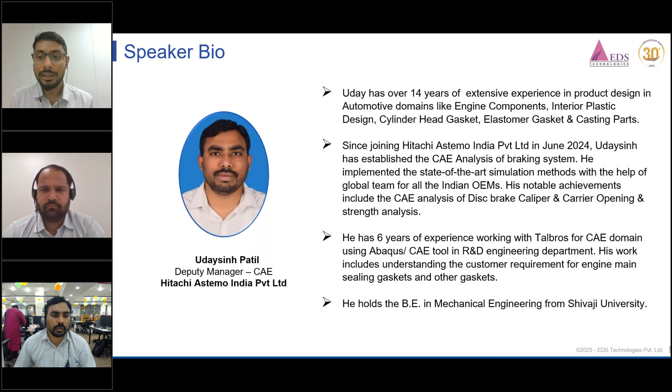Kedar Gokhale. Kedar is a senior application engineer with over 8 years of experience specializing in nonlinear structural dynamics, high velocity impact analysis, and crash simulations. He has successfully managed 3DEXPERIENCE SIMULIA, Abaqus, and isight projects and services across various industry verticals and handled multiple customer issues and escalations. So over to you, Mr. Uday sir. Good afternoon, all.

Myself Udaysinh Patil, and I am working at Hitachi Astemo India Pvt. Limited as Deputy Manager in CAE from June 2024. Yes, Kedar, next. So I briefly introduce our company. Hitachi Astemo was born in January 2021 from the merger of 5 companies: Hitachi Automotive Systems, Keihin, Showa, Nissin Kogyo, and Kalyani Chassis Brakes. So with the merger of these 5 companies, which brings strengths and abilities to make significant contributions to safety, comfort, and environmentally sustainable technologies for mobility. And that's the name integrated, Hitachi plus Astemo, Hitachi Astemo.

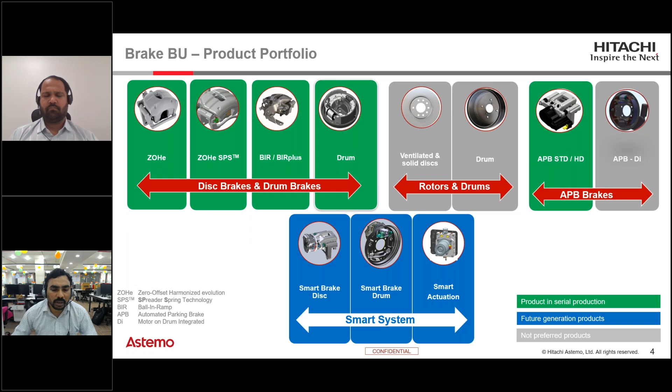So earlier in Hitachi, for meshing as well as model preparation for simulation, we were using CATIA V5. Our global technology and global process is using CATIA V5 tools with FMS, which is for surface mesh, and FMD for solid mesh, for CAE simulation model preparation.

And due to these separate tools, different types of mesh like surface as well as solid mesh we have to prepare to make an analysis model. And also we required another AFC tool to export that model which is meshed in FMS and FMD in the CATIA tool. We have to export with another license, AFC, to convert it into export files.

For example, for Abaqus we can use the input file .inp. For other tools it would be CDB and all. So it requires another tool for exporting that mesh. So all tools required basic CATIA licenses for the CAE engineer to perform model preparation for CAE: meshing, section, material assignment, connections, set creations and all.

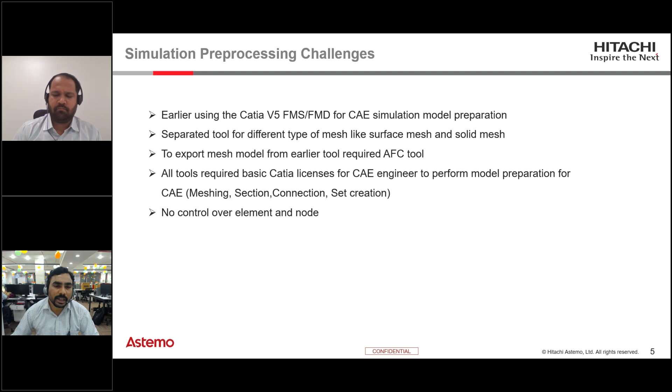So we have limited control and tools over the elements and nodes for selections, as well as to capture the critical areas of the geometry as per the casting parts and all. Yes. Okay. So this, yeah.

So we have moved from this combination of FMS and FMD to replace it with the 3DEXPERIENCE SIMULIA SB role, where we can mesh the CAD geometry easily. So this is one casting part, which is a caliper. We can import it from STEP as well as a CAD part or any other tool file. Here we can defeature the geometries as well, where chamfers or fillets are included, you can defeature from your part before meshing, which are unnecessary for meshing.

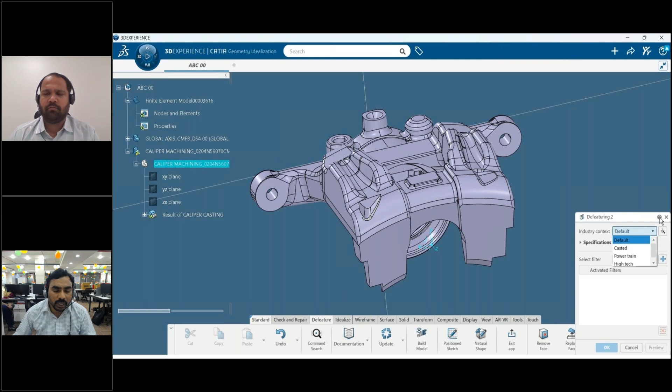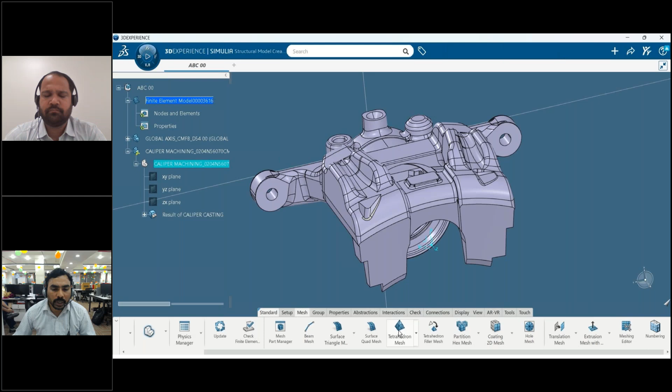So after that we have the meshing combinations with surface triangle mesh, where we have both first as well as second order options, and then we can mesh it with various sizes, and we have other parameters, edit all parameters, where we can edit as per our mesh and analysis requirements, where we have geometry as well as quality, maximum nodal deviation and number of nodes on the edge. These parameters we can set, and we can prepare the mesh on the parts.

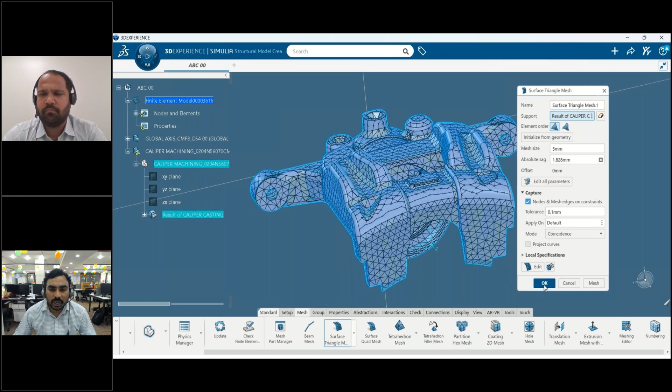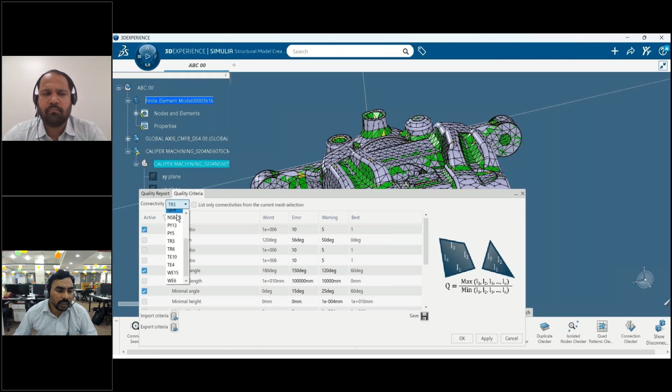So it's easy in 3DEXPERIENCE SIMULIA. We can firstly do the surface mesh, and after that we have to check the quality, and we have different quality criteria. As earlier in HyperMesh also, there are a lot of criteria: element minimum angle, maximum angle, Jacobian. For TET or 3D solid mesh, we have TET collapse or Jacobian. Warpage is also one criterion. So here also in SIMULIA there are different element types as well as different quality criteria, where you can clear the mesh with your quality criteria for analysis.

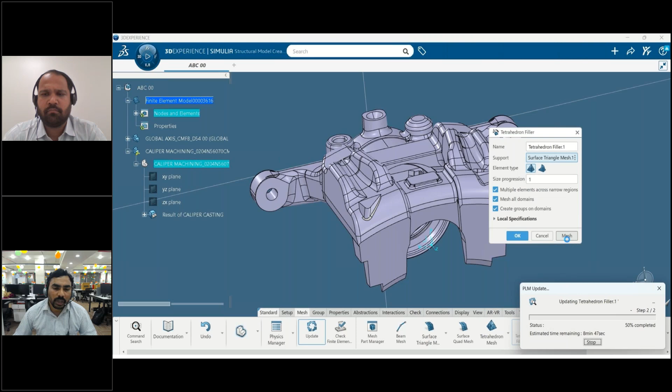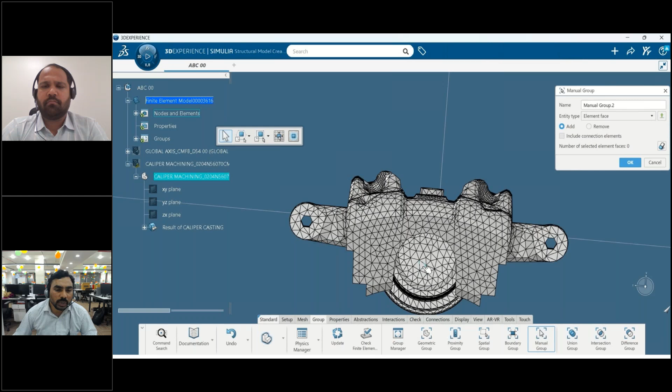After having this surface mesh, we can do a solid tetrahedron filler, which is a tetra mesh, and it is done within a quick time. After that 3D solid mesh, we can use group settings, node settings for boundary conditions as well as load inputs, and for output also, where you need displacement or stress in localized critical areas. You can define these with selection of node sets, manual groups, with various tool options to choose node, element, surface, element surface, as well as full 3D element faces.

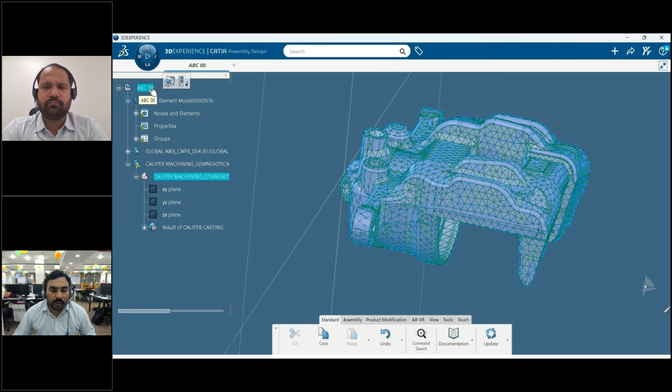Yeah, so these node sets and element sets we can use for analysis, and it is very easy in SIMULIA to make all the CAE deck preparation with these tools. Yeah.

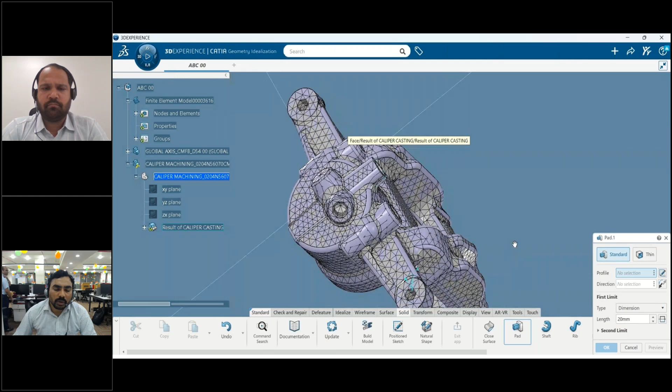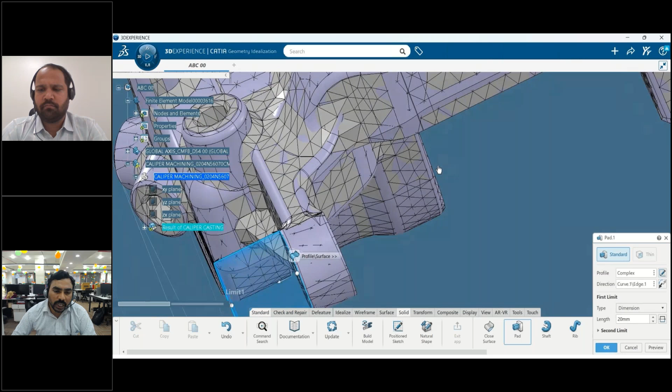And even in CAD geometry, it is linked with CAD tools, for example the CATIA tool; this geometry and the SIMULIA tool are linked. So if in future you want to change any feature, let's say at the bolt hole location, we can add geometry with 20 mm on both sides, and we just have to rerun this analysis. Only this change is there in the geometry.

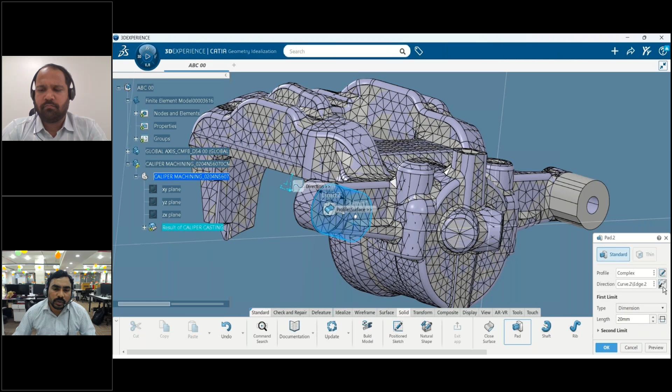So automatically in this SIMULIA software, this part's mesh will update as per the past model criteria, parameters and mesh size. So this is the benefit of the SIMULIA SB role, structural model creator role, where the mesh can be regenerated and updated, and it is linked with design tools like CATIA and others. So if you make any update in geometry in that software, it will automatically update here.

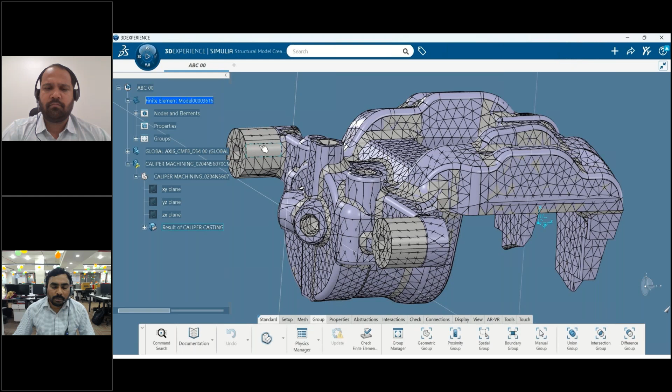Yes, see, these are the mesh updation with surface as well as 3D solid mesh. After that, you can use this mesh model by exporting option. You can use, if it is Abaqus, then you can use the input file for analysis, even other softwares also, like LS-Dyna for crash analysis and Nastran and all.

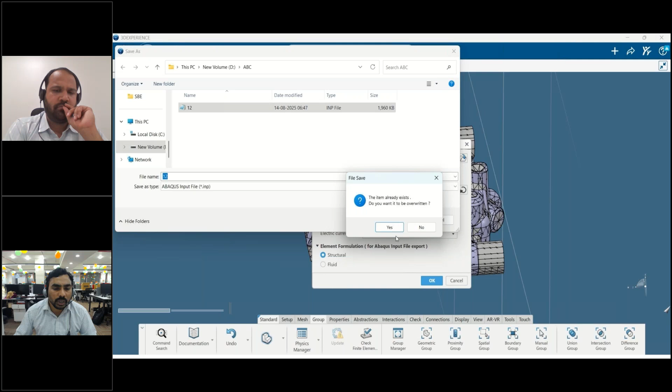So we have exporting output options also. Those are for various different analysis tools like Abaqus, Radioss, and Nastran. Basically, as per the global standards of Hitachi, we have to use these three tools like CATIA, FMS, FMD, and AFC, another tool for exporting that mesh model.

So we have replaced these with one meshing tool of the SIMULIA SBE role, which is having all types of meshing available in a single SBE role, and it gives control over specific elements and nodes. Export option is available with the same GUI.

More meshing features like ruled mesh, mapped meshing, and ruled connections are beneficial in the same role. Easy to manage mesh and connections through feature management. Seamless integration between CAD and CAE, and seamless integration with the existing 3D Experience platform, with parametric capabilities for mesh changes. So that's why Hitachi has decided to use this one for assembly as well as single component meshing, as well as analysis, for this SBE role SIMULIA.

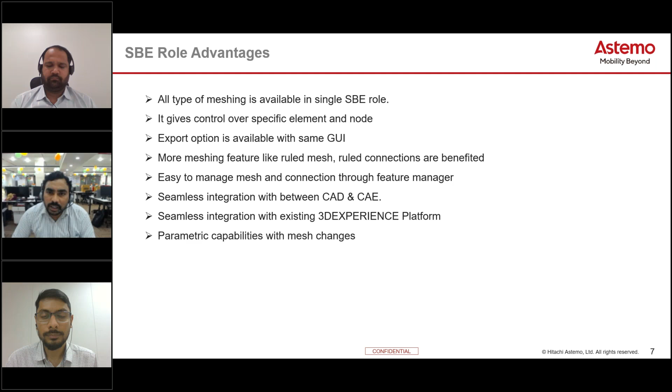Yes, sure. Thank you, Abhay, and thank you, Uday, for the brief knowledge sharing session on this, how it is useful to you or your organization, and how it is reducing time in model preparation. So I'm going into a little bit of technical detail on this particular SBE role.

So my agenda will be: first, automated mesh generation and rule-based techniques, how we are going to use that, and what are the benefits and options you get. Then optimizing the assembly and connections with the mesh and connection manager, how we can quickly change the meshing size, how we can change the connection type or bolt diameter, and how we get control to optimize connection and mesh management.

Then we'll see topics associated with the finite element solver, which type of files can be exported from this particular meshing role or SBE role for analysis, as we've already seen, but we'll put a light on that. Then particularly how this CAD and CAE integration works, how it is useful. We'll see that demonstration in this session.

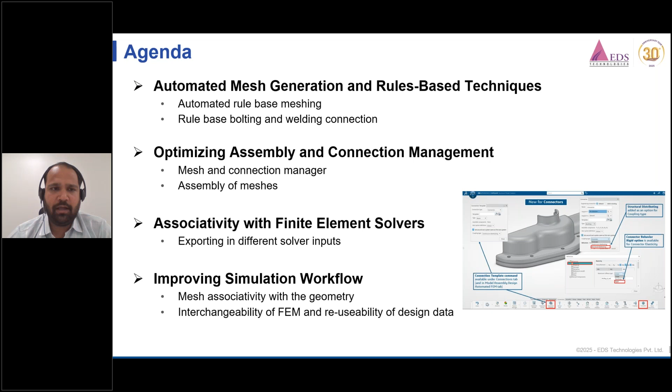So I'm going to show you how rule-based meshing techniques are used in this SBE role. While creating a rule, you get different types of mesh options. Here you can create a rule for octree triangle mesh, or tetrahedral mesh, surface triangle mesh, surface quad mesh, sweep mesh, beam mesh. So each and every mesh type is covered into the meshing rule.

Once you select the meshing type for the rule, you go into the details: which type of element order you want to create, what will be the mesh size, global mesh size, minimum mesh size, and maximum mesh size. In the quality criteria, you can set minimum triangle, maximum quad angle, minimum quad angle, warpage, and skewness.

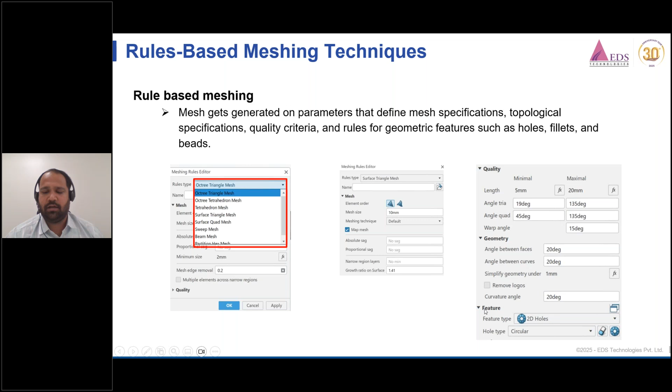Then, what type of geometry you want to capture while doing meshing, you can choose by setting angles for selecting the faces or curves. If you want to put a washer around a hole, you can select a particular feature type and set how many elements you require around the hole, using the feature option. We are going to see this demonstration in detail, how we use that.

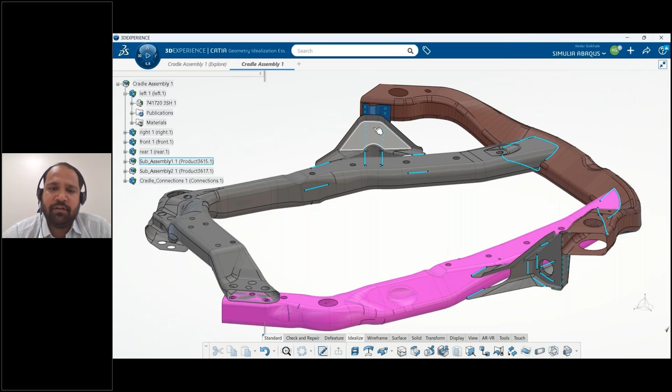For this, I use the cradle, an automotive cradle assembly, in which the surface components are there, along with welding locations, seam weld locations, and point weld locations, shown here with the blue lines. These are weld locations and weld points on which we need to create connections. There are also bolting locations where we need to create bolted connections, and we can create a rule for the connections as well as the meshing.

So here we'll see how to create a rule for the mesh and how it is useful for mesh creation. I'm going into automated FEM, where we first need to create a rule, and it can be used for any type of geometry in the future. Suppose you import a different part, you can use the same rule for meshing. Once you've created a rule for the mesh, you can use it at any time—it gets saved into the 3D Experience platform.

So here I am generating a particular surface quad mesh rule. I have selected the mesh type as a mix mesh, element order will be first order element, and mesh size will be around 10 mm.

Here you get different types of mesh: quad dominant, mix, and tria dominant. Here I am setting the mesh size to 10 mm, and the mesh technique I am setting as default. The growth ratio you can define as 1.41 or anything whatever you require.

Then for capturation of the geometry, here I am setting the capturation limit. I increase that to a 45-degree angle, so every surface will get considered and selected. So this is my quality criteria.

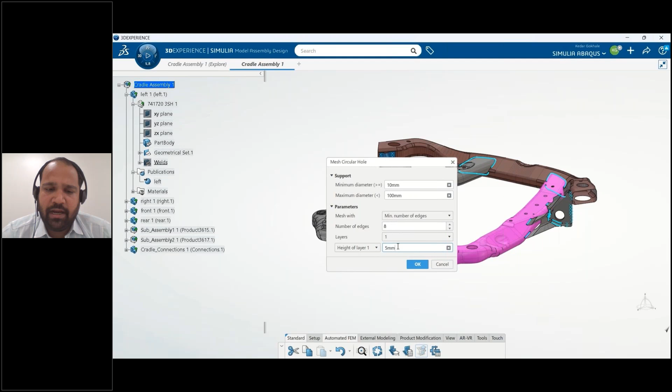One layer is sufficient for me, and the layer height will be 5 mm. So I've created this rule, and it will get saved into the platform. You can fetch it at any time while doing meshing and apply it to your part, automating your meshing with the rule mesh.

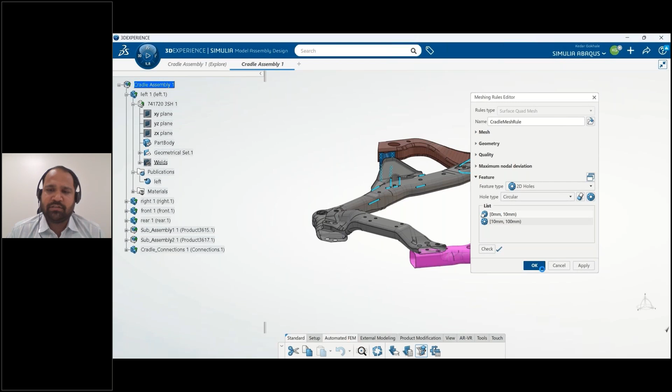So this particular mesh rule is created. Now I am going to assign this rule to all the parts available in the assembly, and we are going to create an automated mesh. For that I will go into the automated FEM.

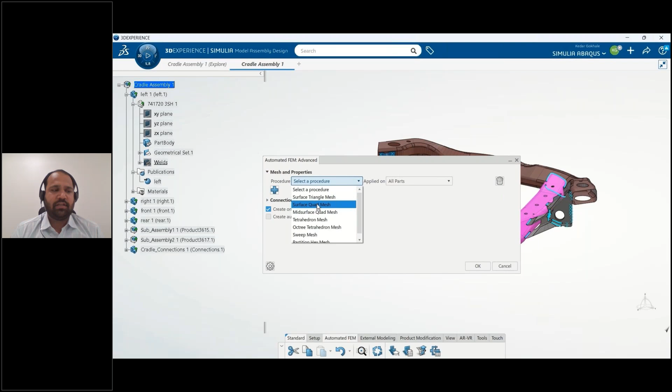In that I will create an advanced option for the automated meshing. Here I want to select the procedure, so I will be using a surface quad mesh. Then it will be applied on all available parts, and selection will be on the main body.

So the main body of the part will get the surface mesh applied, and support for that mesh or body will get it from the available publications linked into that geometry. Now we need to select that generated rule, so here I am selecting that generated rule for the surface mesh.

So I am fetching it from the library which is already saved - we have created and saved it. So this is available, now I'm selecting that particular rule. Once you have selected it, this criteria gets applied to the meshing style.

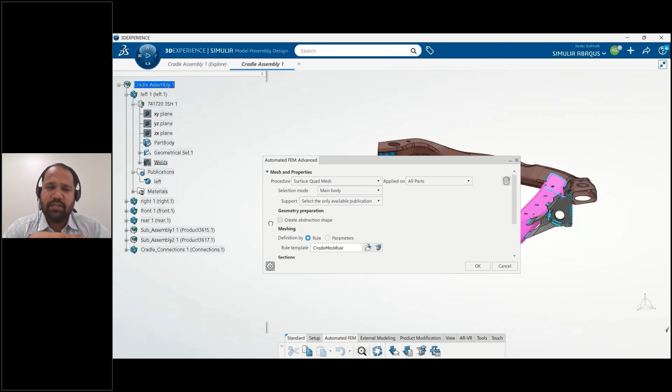So this is done. Now here we get some options for the settings to do exclusion or inclusion of the mesh and all - particularly quality criteria and all, if you want to fetch it you can do it, and automatic export option is also there.

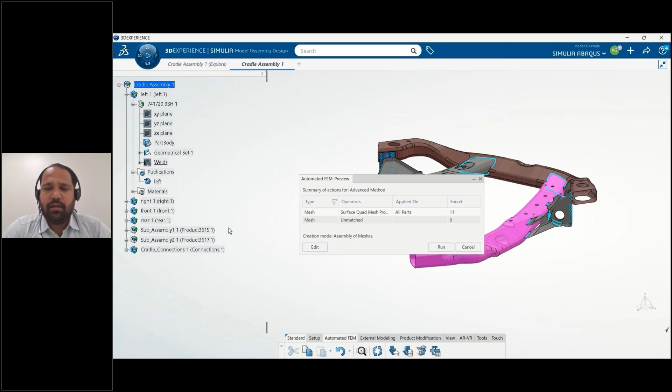Then once this setting is done, I am setting OK, and I will do this automation. Now you can see the mesh parts found, 11 parts are found, and there are some parts that are welding lines that need to be excluded, as they don't require a shell mesh or any mesh.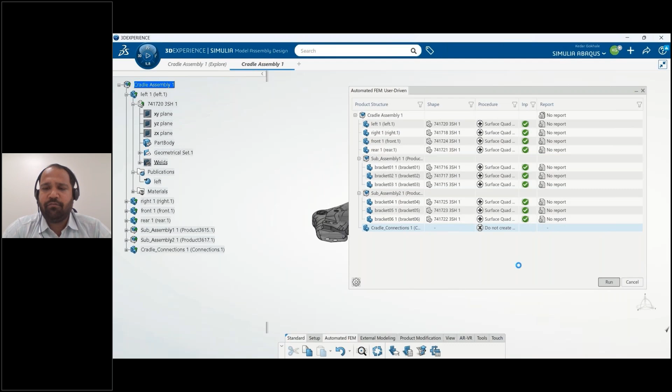So I'm going to exclude those particular weld line parts from the meshing automation, and I'm going to run it. After running it, it will execute step by step over each and every component - this process you can see in the progress bar.

So out of 10, 0 parts are meshed. So once it progresses, you will see one part meshed, second part meshed, and if it fails according to the rule we have set, it will get reflected into the failed FEM parts.

So once it is done, we can view the mesh, how it is captured, how the geometry is captured, whether the mesh around the hole is maintained or not, how the washer gets placed around the hole. So now you can see the progress in a progress bar.

So 3 out of 10, 4 out of 10 parts got meshed. So like this, it will get processed. If your assembly is made up of 100 or 150 parts, it goes step by step.

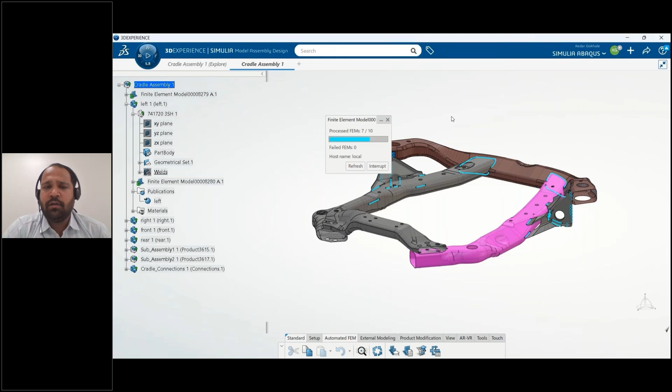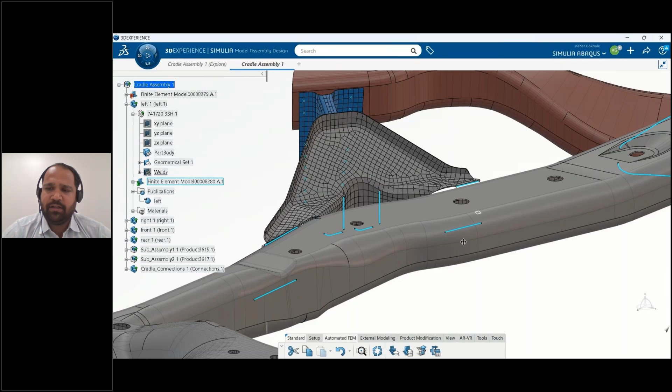Now you can see the report - zero errors found and all parts got meshed. Once you say yes, done, you can see the mesh in the background. So I'll say okay, and we'll view the mesh. After applying the shell mesh or the rule mesh with the surface quad element, you get this particular mesh.

If you want to edit this particular mesh, you can go individually to that particular component and edit it from the feature manager. We'll cover that in a later session, to see how to use it.

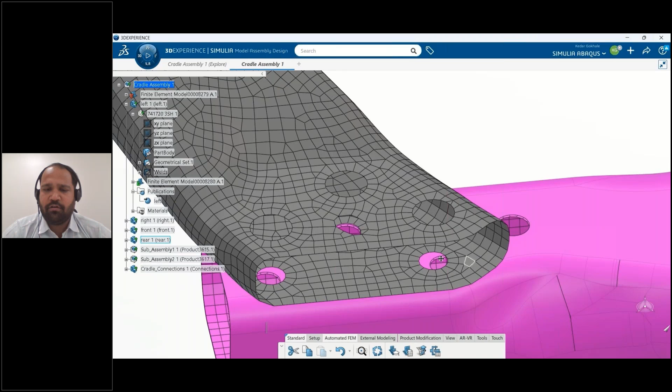Here mesh around the hole, we have set it as a minimum 8 number of elements, and that criteria has been achieved. So that particular criteria is achieved, and a washer around each and every hole is placed. This is the particular quality for the automated generated mesh.

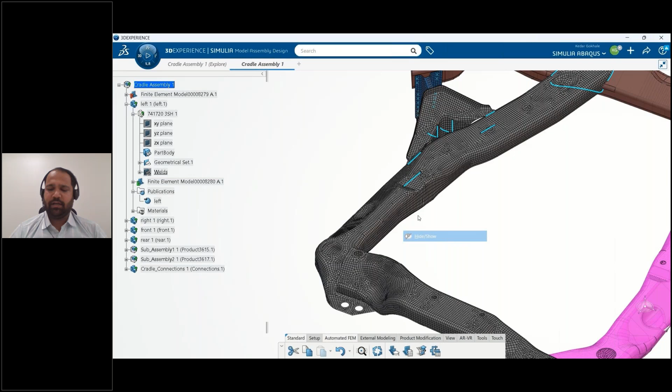Similarly, you can do the connections like creating a bolted connection, a line fastener, line welding, surface welding, or point welding. You can create these by a rule-based connection template. In the rule-based connection template, you need to specify what type of connection you want, what will be the head diameter, nut diameter for the bolting connection, what will be the construction of the mesh, and so on.

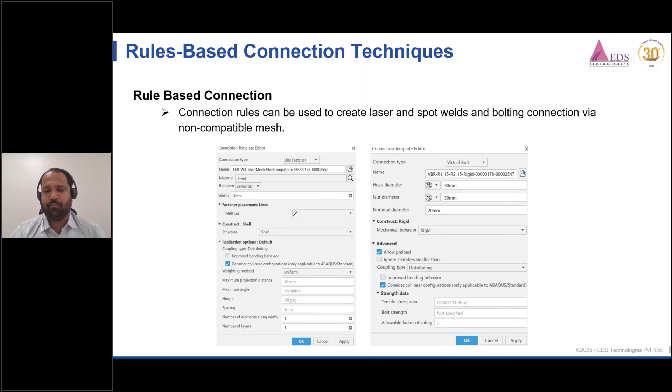Similarly, you get options for what kind of geometry you want to capture. You do that particular settings and run the rule for the geometry, and it will create connections by maintaining that rule. So it will look like this, which we have generated by using a rule-based connection.

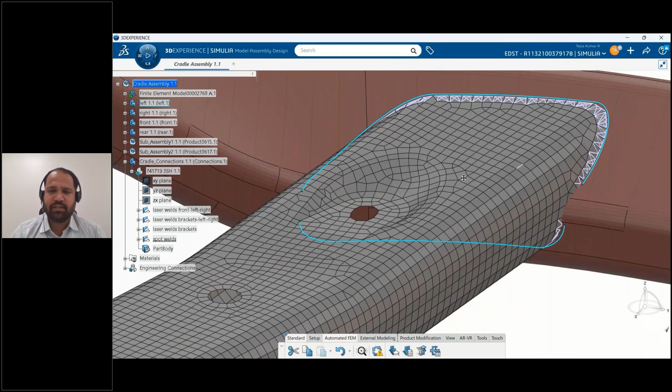Here the particular welds have been generated with the shell mesh. In a curvature area this particular weld element got created. You can see the bolting elements also, welding elements also. Here we can see the shell welding element in this particular section, like this.

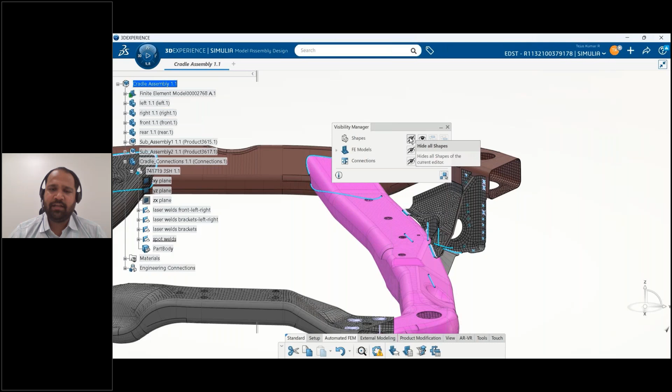So all over where the line is drawn for the welding, the weld got created. It will not miss any geometry. Wherever you specify the welding line, it will generate a mesh with the specified criteria. You can see at each and every location it got created.

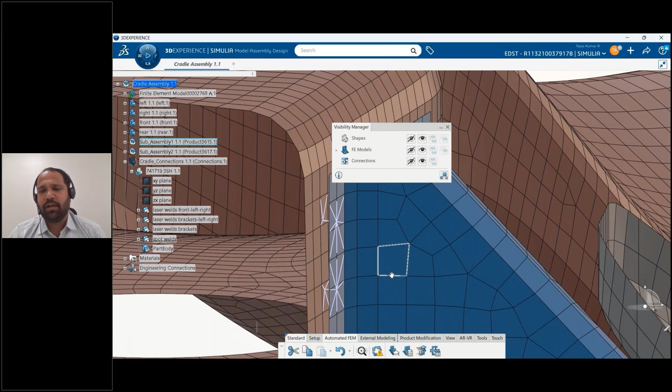Here a 1D beam element also got created for the welding connection. So in some sections we have created a beam welding element, and in some sections we have created a shell welding element, and it got created according to that.

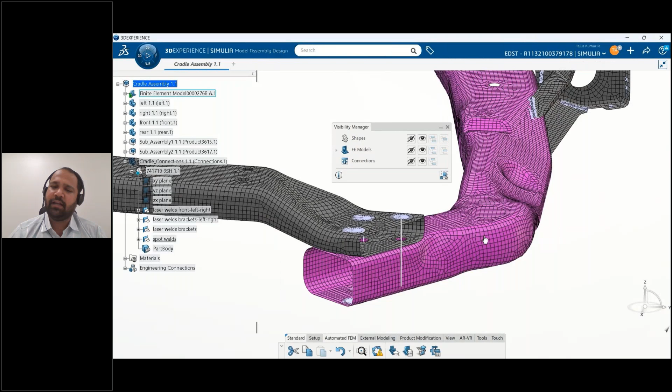Then these are the bolting connections we have created. According to the node and head diameter, it got created according to the hole size. So welding connection as well as the bolting connection are also created by using the rule-based connection method.

Once you're done with the meshing and the connection, later on if you want to go to a specific location and change it, you can easily do that by accessing the particular feature manager.

For the meshing, it will be a mesh part manager in which you can see which type of mesh is there and what will be the size. If you want to increase the mesh size, you directly go into this column, change the particular size, and regenerate the mesh for that individual component also.

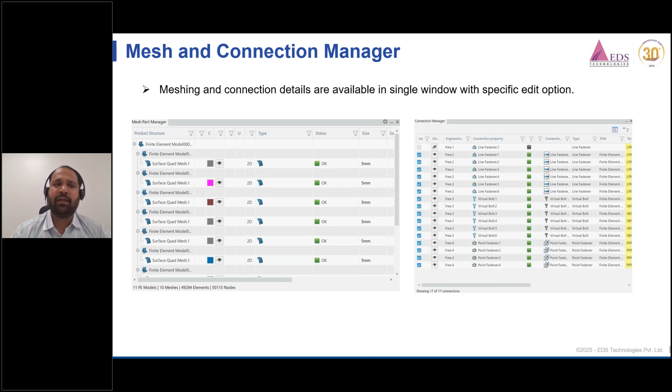Here also, in the line fastener, point fastener, or virtual bolt connection, you can create or edit the particular connection or welding definition by accessing through the connection manager. We'll see the particular demonstration in the video.

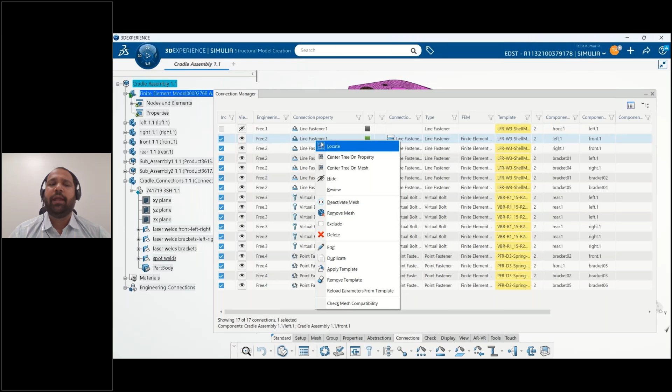So this is the particular connections and mesh geometry. We are into the connection manager. Here line fasteners are there, nothing but the shell welding geometry. So if I want to edit it, add to it, or make some changes, I can easily access that particular thing.

If I want to change the material, or change the component at that particular location, I can do that by accessing the feature manager. Here you will get all of the editing options which are available in individual definitions also. So here it will be 3 mm, and you can increase or decrease it.

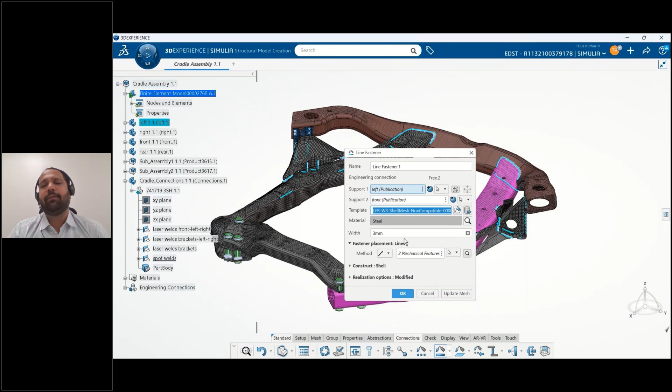Similarly, you can have access to the bolting connections also. Suppose if I edit this particular bolt connection, here you can see the edges I have selected automatically. Here you can change the definition, the bolt and all that, the diameter of the bolt, head diameter, and so on.

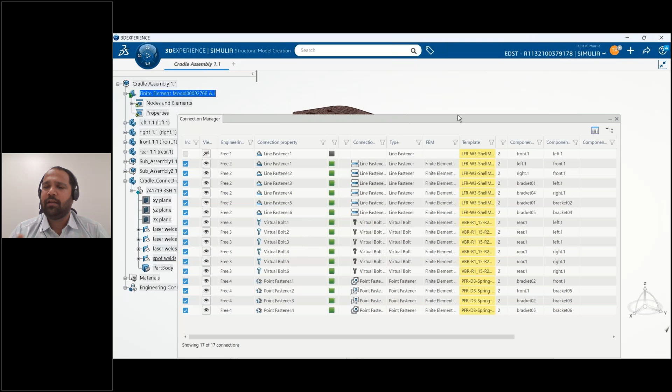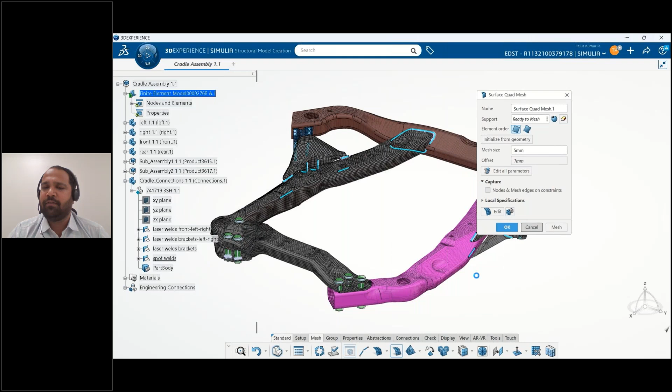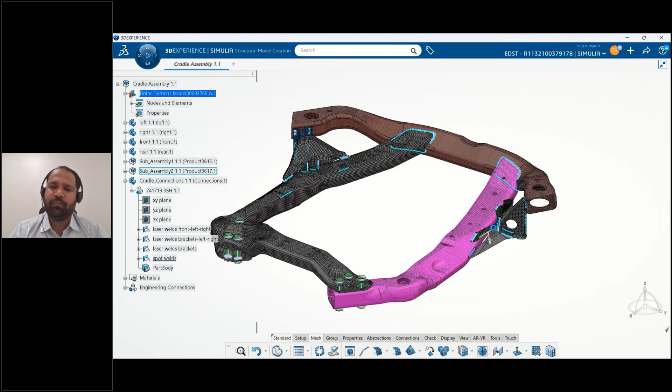So this particular thing you can manage from the mesh and connection manager or the feature manager, and you can easily pick that particular part and the connection and easily edit it. Then it has a very good feature, that is assembly of mesh. Once you import the particular assembly into the SBE role, it will create a top FEM representation in which all the other part FEMs get called.

Suppose in the future you want to do an FEA analysis with the single part, then you will go into the single part, fetch this particular mesh and do the analysis. So at that time you don't need to remesh that single part again. That's the benefit you get: your mesh or FEM representation is always linked with your part, and whenever it is called, it comes with that particular FEM.

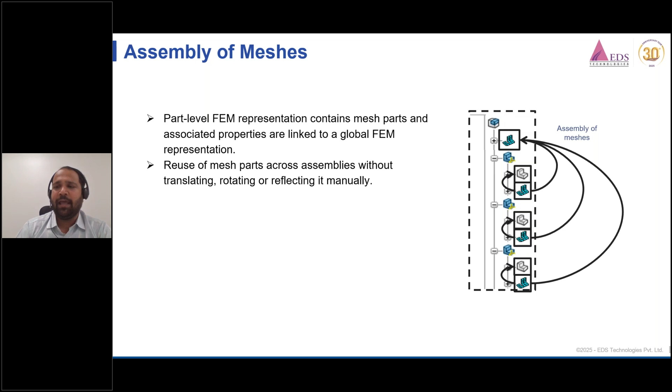Suppose this part gets used in another product line. When you assemble that part into that product line in the CAD, it will go with the FEM. Whenever you want to do an FEA analysis with that mesh, you can use it. So reusability of the FEM representation can be done and there's no need for repetitive meshing. So we'll see a quick demo of how the linking process happens and how you quickly generate an assembly of mesh.

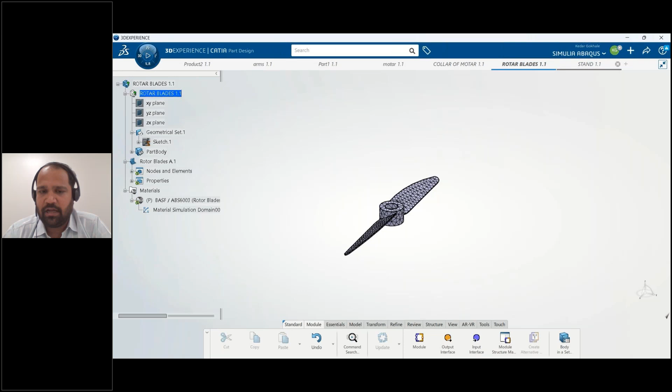So this is a drone assembly we have taken, and we have created individual meshes for the individual components of the drone. So this is the arm, this is the base part, then the motor, then the rotor blade shaft, then the rotors, then the stands. Now we want to assemble it. If we use a preprocessor available in the industry, you need to call this particular mesh and arrange it, like reflect it, rotate it, or position it at the other location.

Now here I am just linking the FEM with the CAD. Once I link it, this FEM goes into the assembly and sits where it's required. So here in part 1, I'm selecting the base FEM I need to link with part 1. Then part 2, again the base I want to link, so I will link it. Now here 4 arms are there, so I don't need to link them separately. I will link it at all instances, so all 4 arms will get placed at their locations.

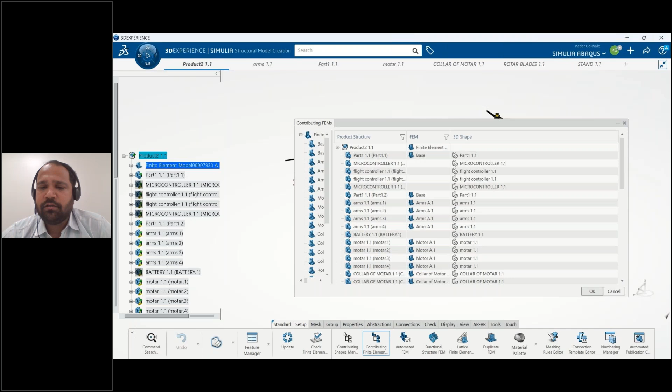Similar with the motors, then the collar of motors, rotor blades. So repetition of parts will be there. You can quickly arrange this assembly of mesh and quickly create your required mesh for the analysis. So you don't waste time rotating, reflecting, positioning it. No need to do that. It will take it automatically from the linking. So here in the background, the assembly of mesh is ready for analysis. Now you can define your connections and do your analysis with this particular mesh geometry.

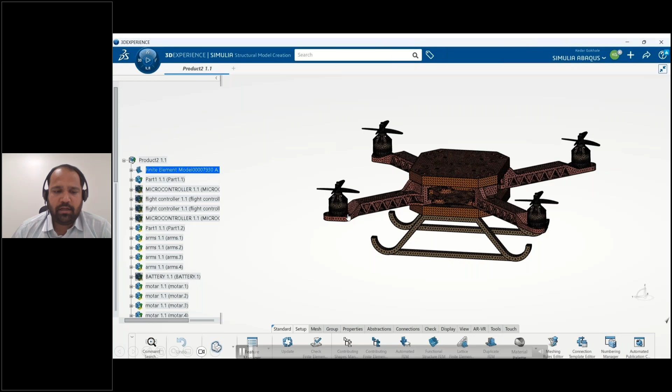Now we'll see associativity with the CAD. Uday has already explained that very good and beneficial feature. When you update the geometry, your mesh will automatically get aligned with the updated geometry. So you don't need to remesh it or apply the mesh and then check the quality criteria. None of that needs to be done.

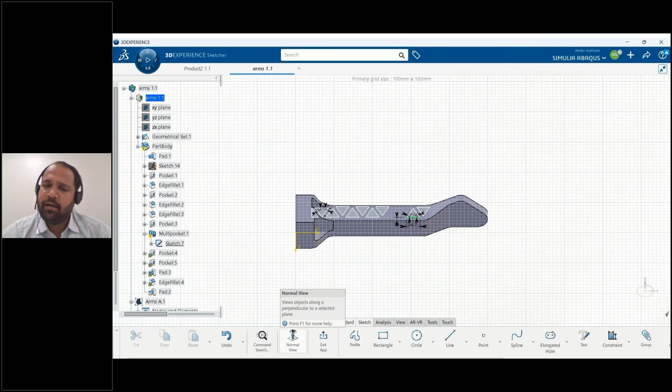So here I'm changing this particular pattern into slots, so we can have some mass reduction in the arm. So we'll remove this triangle pattern and place the slot section. So here I have replaced this pocket section with the slots, and now I want to use this updated design for the analysis. Now I'm going into the mesh.

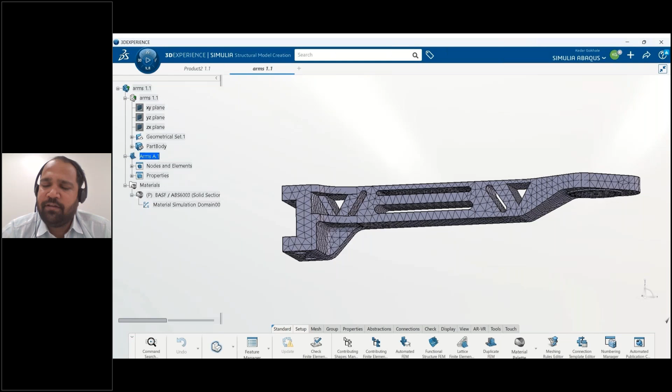Now here you can see the mesh is not aligned with the updated CAD. Now I will go into the mesh and just say update, and it will automatically get aligned with the geometry. Now you may have a specific question: can this happen with the shell mesh, or can it happen with the hex mesh? Yes, it is possible. You can do that with the hex mesh and the shell mesh also. You can have this feature associated with the CAD.

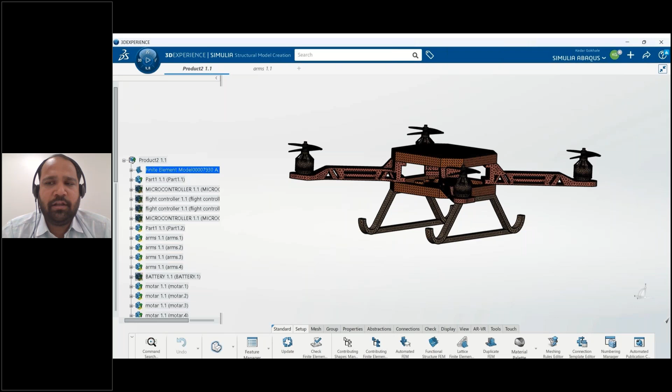So by using this feature, you can explore your part design in a different way. You can have quick iterations for quick analysis of this product, and you can quickly review your design. So these are the benefits.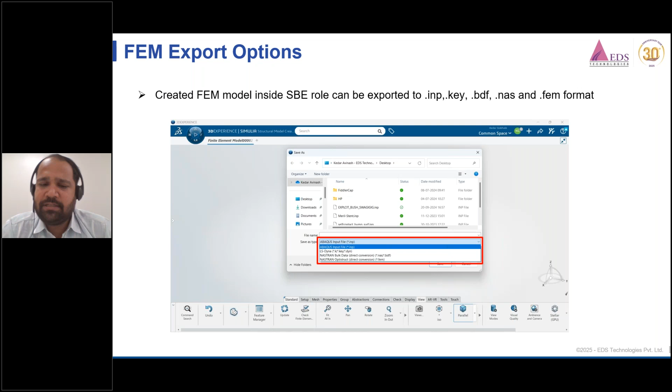So by having the SBE role, we can have different types of benefits. First, you get associativity with different CAD tools. Whatever CAD tools you have, we can connect with them. We have different CAD connectors, so we can connect the SBE tool with that CAD tool. Then in this SBE role, you can build finite element models efficiently using meshing rules, manage sub-assembly connections, generate weld connections, and reuse re-engineering design data. So you can reuse your earlier generated orphan mesh for the analysis.

Then you can manage the sub-assemblies and utilize the automated assembly connection modeling, the rule-based automation procedure we have seen. Then you can generate an abstraction shape, like a mid-surface, or remove small fillets, chamfers, or logos from the geometry, in the SBE role. No need to go back to the CAD tool or a geometry cleanup tool. These are available inbuilt in the SBE role.

Then there is collaborative model management for building and sharing models, particularly suited for large assemblies. Suppose you have a 150 or 200 part assembly where you need to generate a mesh very specifically. You can automate the meshing and connections, and reduce your time for simulation as well as pre-processing.